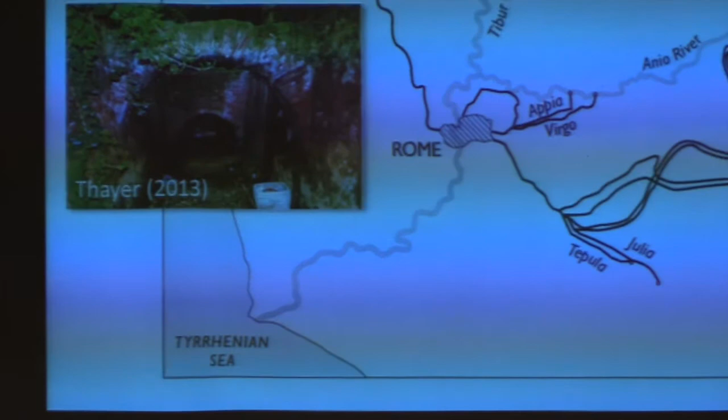So let me start with Water 1.0. In the book, I call it 1.0, 2.0, 3.0, and 4.0. It's kind of like computer operating systems — someone makes a small improvement to it, so you give it a number after the decimal point. So 1.1 becomes 1.2, then 1.3, and then someone says, hold on, this doesn't work well anymore, let's come up with something completely different, and you give it a number 2.0. And you go from there.

So what I tell my kids is Water 4.0 is just like Windows 8 going to Windows 9, except this works. I'm a Mac user, and we struggled with the computer tonight, so I can say bad things, but it's actually my computer that made the trouble.

In the book, I call the Romans and their way of providing water for cities Water 1.0. That's because the Romans took ideas that had been floating around in the ancient world and created a system. They took elements that other people had come up with to supply water into cities, and they systemized it, making it possible for a city of 1 million people to provide about 100 gallons per person per day of water.

That's pretty amazing when you think about it. That's like contemporary water use—not just the amount needed for cooking, bathing, and occasional house cleaning. That's what we use in our house today. And if you think about how much water we all use, here are the Romans 2,000 years ago providing everyone in the city with that amount of water.

This figure shows you a map of Rome from the height of the empire, and this is the full extent of the Roman aqueducts. You can see those aqueducts brought water from a distance of 50 or 60 miles away into the city, a series of different aqueducts built at different times.

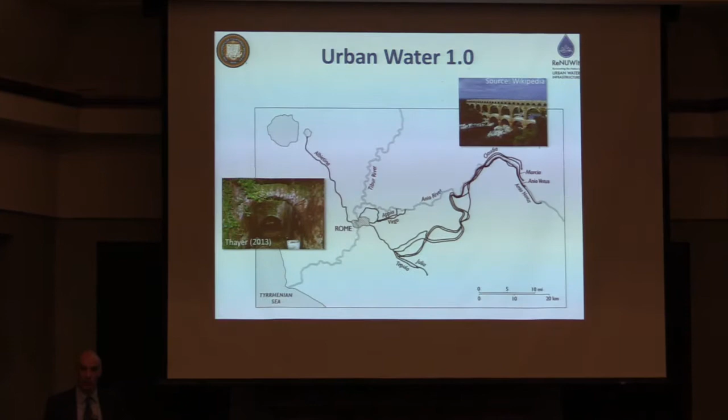The water came into the city and was used for more things than just drinking. There were fountains in central squares, ways that people could access that water. It was used for holding mock naval battles and for the famous Roman baths. It was used all over the city to make the city not only a place that people could live, but a place that was pleasant to live.

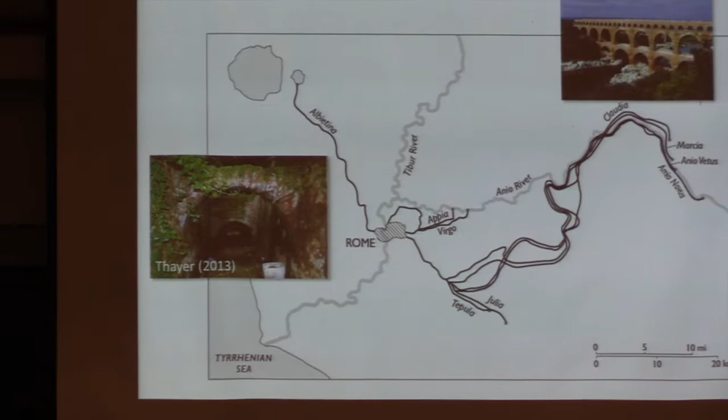When they were done with that water, it flowed into the street, going to the nearest low point, which in the early days was a ditch. Over time, those ditches traversed all around the city and got covered up because it was inconvenient to have ditches full of flowing water running through the center of the city. So the Romans not only gave us aqueducts and imported water, they gave us sewers. The cloaca of Rome are almost as big an accomplishment as the aqueducts that brought water into Rome.

When we think about why the Romans created a system like this, the first thing we recognize is that when you have a city with close to 1 million people, you can't get by on just the local water resources. You quickly exhaust the groundwater. And if you're not located on the shores of a great big freshwater body, like one of the Great Lakes, you overwhelm the capacity of the rivers to provide you with water. So the Romans did this in part because there was no other way to support a city of 1 million people than to have an imported water supply.

But I also wonder if the Romans did this a little bit to show off. If you think about what the Romans did in their capital, these were the richest kids in the ancient world, and like the nouveau riche that they were, they needed to show their neighbors how much stuff they had. They showed it by building great buildings and great monuments. In some ways, the aqueducts and this flowing, inexpensive, inexhaustible source of water in the city was proof of Rome's power and the power of the empire.

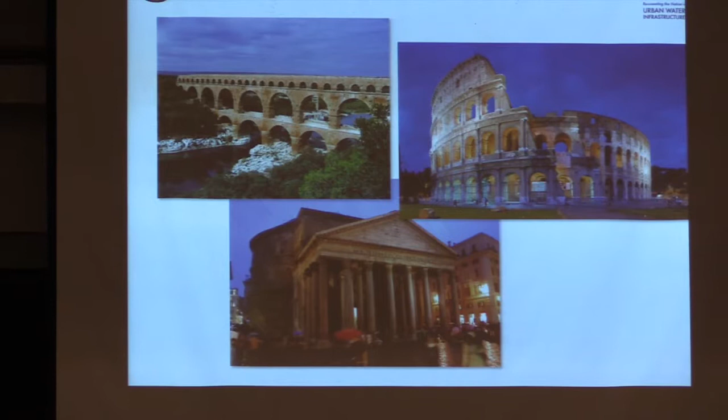It wasn't until the second half of the 19th century, when the Industrial Revolution came, that cities started to grow to the same size as they were during the Roman Empire. Starting the second half of the 19th century, you had London and then Paris growing to populations greater than 1 million people and exhausting their local supplies of water. When they exhausted those local supplies, they took a page out of the Romans' playbook and started building their own version of Water 1.0: a gravity-fed imported water system through aqueducts, sewers to drain the water out of the city, and then disposing of the water in the nearest water body.

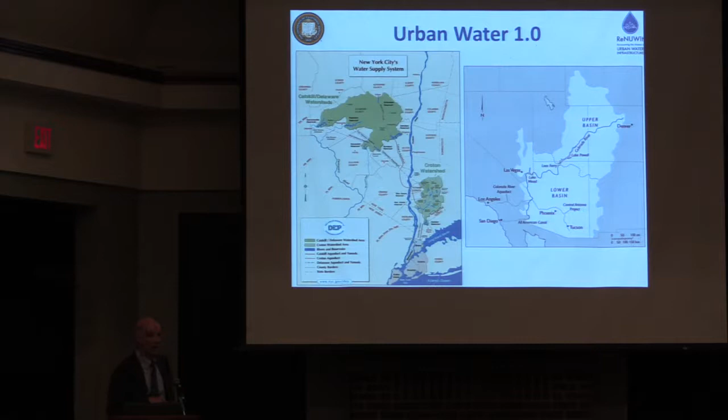In North America, we did something very similar. These figures show you the amazing gravity-fed system that provides New York City with its water. Before New York City's Croton and Catskills watershed systems were brought into the city as a source of drinking water, people in New York were struggling to find water.

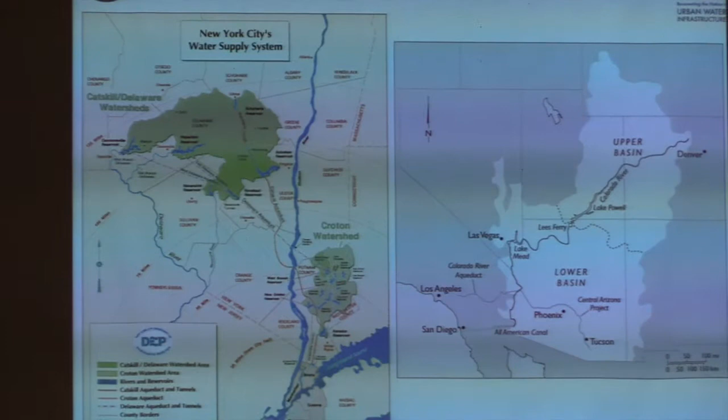They were drinking anything they could find. They were fighting over water, and they weren't consuming a lot of it. But when the people of New York made the investment in an imported water system, suddenly water was plentiful and widely used.

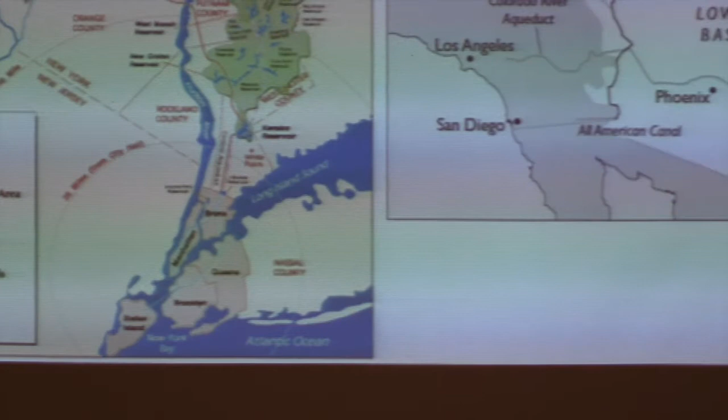But if you look at the heart of that New York City water supply system, it looks like the Romans' version of Water 1.0, just bigger. Instead of 1 million people, you have close to 10 million people in New York, and instead of bringing the water in from 50 or 60 miles, you're maybe bringing it in from 150 miles.

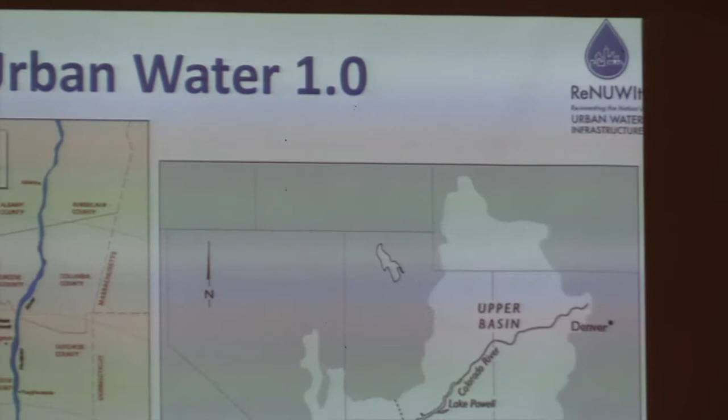It's the similar idea, just in a different time period. And if you go over to the other side of the screen, you see the Colorado River system, where in the early part of the 20th century we came up with a way to bring water into Southern California, into Las Vegas, and into Arizona, to make it possible to live in Phoenix and Tucson and San Diego. All of this was made possible by a gravity-fed system that started in the Rocky Mountains and brought water down to the coast. There you're talking about a factor of 10 bigger than the Romans, and you're also using that water for irrigation and creating farming in a desert. These are some pretty amazing accomplishments enabled by a pretty ancient technology.

There was one difference between the version of Water 1.0 built in the 19th and 20th century and the version the Romans had, and that difference laid the seeds for the next revolution in urban water. You see, when the people of London or Paris or New York built their gravity-fed water systems, they had something that the Romans didn't have: the steam engine, the water wheel, and more modern materials.

With these innovations, you didn't have to rely on just delivering the water to a fountain in the middle of a plaza and having everyone come with a bucket or a jar to take water up to their house. You could pressurize that water and send it all around the city and into people's homes. That was just the most amazing improvement in quality of life, because now instead of spending all your time hauling water up to your house and using it sparingly because it was heavy to carry around, you had more water than you knew what to do with in your house.

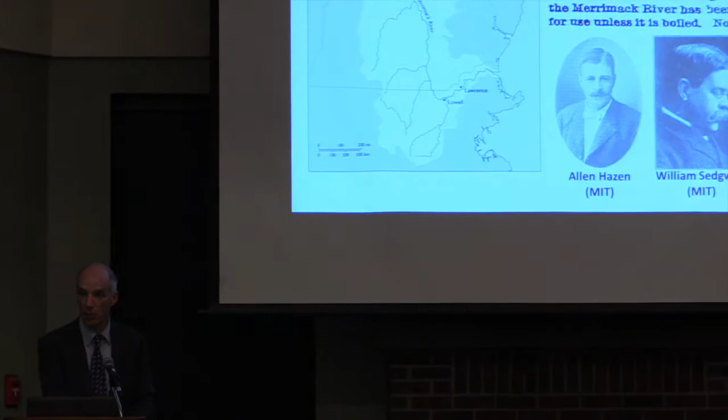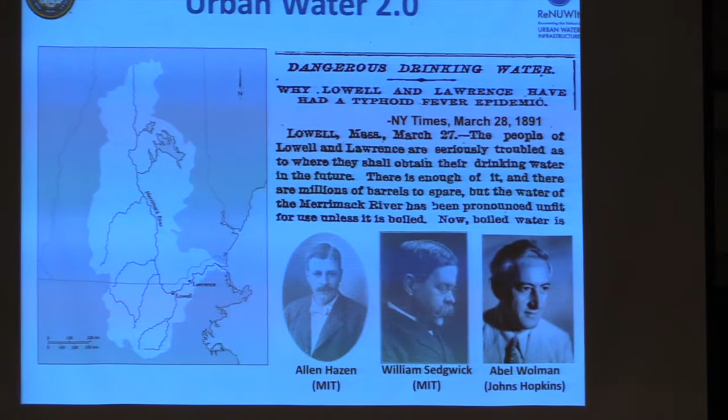So what we started to see in the late 19th century and early 20th century were outbreaks of waterborne diseases, like the cholera epidemic that hit London and parts of Europe in the latter part of the 19th century, or this example, which I talk about in Water 4.0, of the cities of Lowell and Lawrence on the Merrimack River in Massachusetts. I chose Lowell and Lawrence for a couple of reasons.

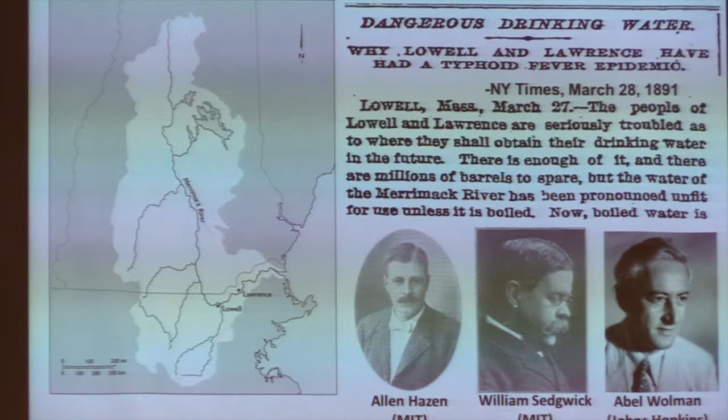Lawrence, like many places, when they started having problems with waterborne diseases from sewage contamination in the water supply, many cities just found a new source of water. They brought in an imported water supply from a pristine source and stopped drinking the polluted river water. But the poor folks in Lawrence didn't have that option. There wasn't an easy way to import water or dig more groundwater wells, so they were stuck with the Merrimack River. And the people in Lowell weren't about to stop using their toilets and putting their waste into the river. So you had these incredible outbreaks of typhoid fever.

So what happened at that point was that in desperation, they needed to find a way to drink sewage-contaminated water. And these desperate people did what desperate people do all the time: they put their faith in engineers and technology. Specifically, the engineers they put their faith in were a team from Massachusetts Institute of Technology's Lawrence Experimental Station. These engineers took ideas that had been floating around in different bits and pieces in previous decades and created Water 2.0.

Water 2.0 is drinking water treatment. It's the way in which we can take sewage-contaminated water and drink it without getting typhoid fever or cholera. It's truly a miracle in terms of its simplicity and its reliability.

Basically, the idea that the first drinking water treatment plants embraced was the slow sand filter. That is, if you pass water over a column of sand and let that sand develop, what happens over time is that microbes grow on the surface of the sand grains. Those microbes secrete a slimy coating called a biofilm, which acts as a glue and traps all the toxic microbes that can give people waterborne diseases. So the sand filter and its microbial community was capable of removing typhoid fever bacteria and the organisms that cause cholera and many other diseases from the water.

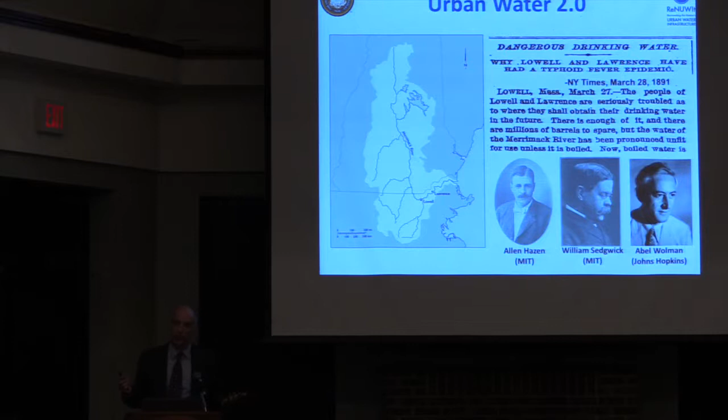So in a period from about 1900 to 1920, you went from a time when people were getting sick from drinking their city water supply to a time when it was safe to drink those water supplies because they'd embraced this revolution in water technology. And when you look back on the 20th century, you can see statistics from public health experts that show the average lifespan of Americans increased by somewhere around 15 years due primarily to safe drinking water.

So it wasn't just typhoid fever and cholera that was prevented. There are a variety of waterborne diseases that people didn't even realize were waterborne diseases that were killing people and affecting their quality of life. And this revolution, Water 2.0, made it all possible. So there's the first two revolutions in urban water.

Now, the thing that we weren't doing at that time, you might have noticed I said that, was we weren't treating the sewage that was coming out of all these sewers. So we had treatment on the front end, and engineers argued and argued about whether it made sense to treat the sewage to avoid putting these waterborne microbes into the environment. But they concluded it was just more efficient to let dilution do its thing, letting contaminants and microbes disappear in the river, and only treat the water you're going to drink rather than bother treating all that sewage. But there were some people who had a different opinion.

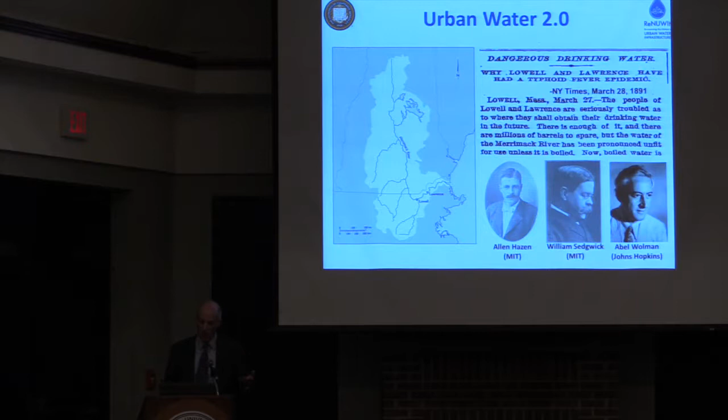There were people who thought it didn't make sense to put human waste into rivers and pollute those rivers. And they developed a technology which I'll call Water 3.0: the activated sludge treatment plant. There's a second kind of treatment plant called a trickling filter that uses the same general ideas, and it was also popular.

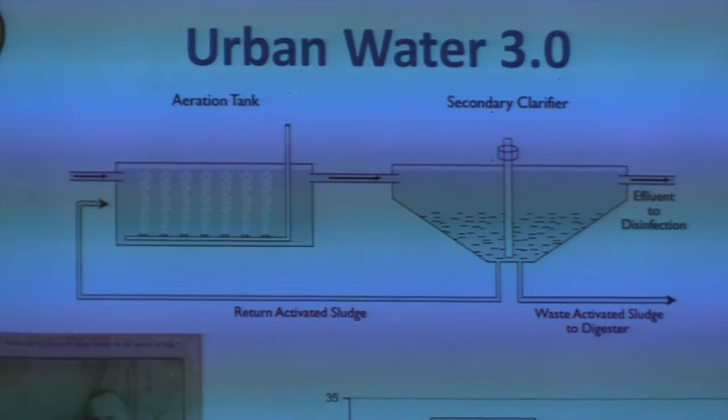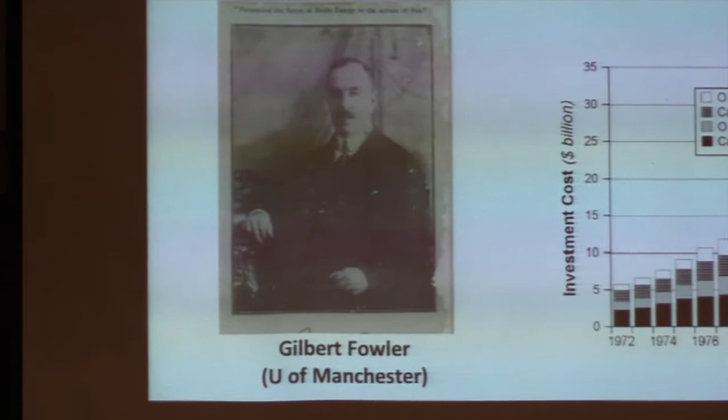But this activated sludge treatment plant is the treatment technology that most of us have treating our sewage today. So I don't know what you have here in this part of Ohio, but I'd guess you probably have an activated sludge treatment plant. This technology was developed in the first 20 years of the 20th century by people like Gilbert Fowler at the University of Manchester. They recognized that you could use microbes to break down the organic matter and remove all the nasty things in sewage.

So we had this technology developed in the 1920s that made it possible to treat sewage and prevent a lot of the problems that sewage discharges were causing, but most people just didn't think it was economically a good idea. So you have this period from the 1920s through the Depression and through the Second World War, and even after, when the quality of surface waters in North America, Europe, and many other places became worse and worse as population density increased. If you look back at the history of this time, you'll see people complaining the Great Lakes have too much algae, the Great Lakes are dying, there are fish kills.

Oh, we can't walk by the Potomac River because it's so nasty. The smell of hydrogen sulfide is disgusting. San Francisco Bay? No, you don't want to live near San Francisco Bay — the hydrogen sulfide coming out of the mud flats is enough to decay the paint on the side of your building. All of these things were happening, and people said someone should get together and fix this.

Isn't it a shame that the lakes are dying? We should really do something about this. But no one could get together the political will to spend all the money that was going to be needed to install modern sewage treatment plants in American cities.

No one could do that until the Cuyahoga River caught on fire. And no one could do that until people became aware that bald eagles and ospreys were disappearing due to the effects of DDT — which is really kind of an irony, that the catastrophes that led to the modern environmental movement had nothing to do with sewage disposal.

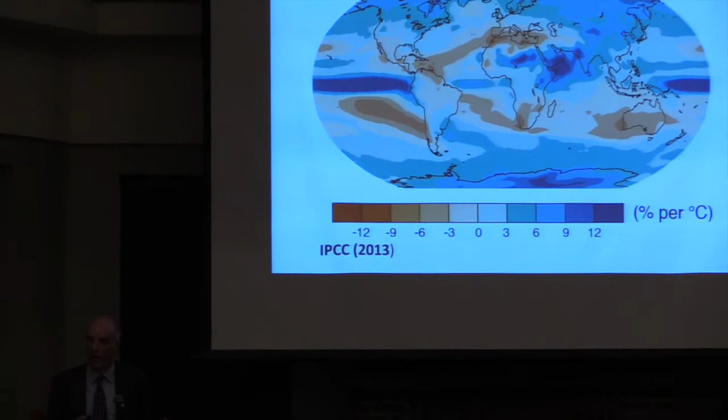For me, the number one concern with respect to the future of our urban water supply in the long term is climate change. I can say that because the science of climate change is showing us that the rainfall patterns are going to be changing. This figure, which comes from the 2013 IPCC report that summarized the state of the science on climate change, tells the story that the wet places are getting wetter and the dry places are getting drier.

If you look at this figure, the axis, or the colors, refer to the percent change in mean annual average precipitation for each degree centigrade of warming that's going to occur. In other words, in the 21st century, the average temperature is going to increase by several degrees centigrade. We have the power to decide how much that increase is going to be, but it's definitely increasing. And for each degree centigrade increase in temperature, some places are going to see 3 or 6 or 9 or 12% increases in precipitation.

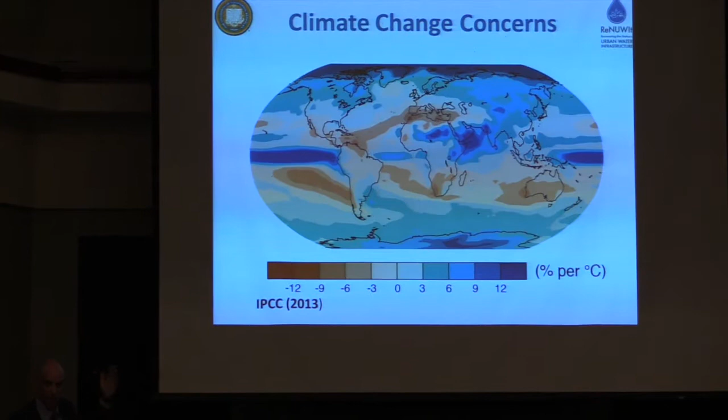That's the blue. And some places are going to see decreases in precipitation by 3 or 6 or 9 or 12%. So the areas that are brown and tan colored here are the places that are going to get drier in the 21st century.

If you look at this figure, you're going to see if you're in Australia, or the southern part of Africa, or much of South America, or the Mediterranean region, or the southern and western United States, parts of North America, you're going to see less rain, less water. If you're in the Great Lakes, more water. But that's the problem with climate change. Some places are going to win and some places are going to lose.

That's one thing that's going to decrease the amount of water available for cities in much of the world. But there's another thing that's going to decrease the amount of water available for cities in much of the world, and that's the change in precipitation from falling as snow to falling as rain. In the Rocky Mountains and in the Sierra Nevada mountains of California, much of our precipitation happens in the winter, in the form of snow, and that snow has this wonderful property of staying put, so it becomes like an in-place water storage system.

Now, when it gets warmer, more and more of that snow is going to fall as rain, and if we want to use it, we better be able to trap it by expanding the size of our reservoirs. That's going to be an expensive proposition, and not an easy one politically. You can imagine with the fights that we have over removing dams now, the prospect of increasing the size of dams is going to be really politically contentious.

I think we could probably do that in the Rocky Mountains and in California and parts of North America, but there are other parts of the world like Peru and India where people rely on glaciers as a source of water storage. And the predictions are that once those glaciers disappear, there's going to be severe water shortages in India, Peru, and other places.

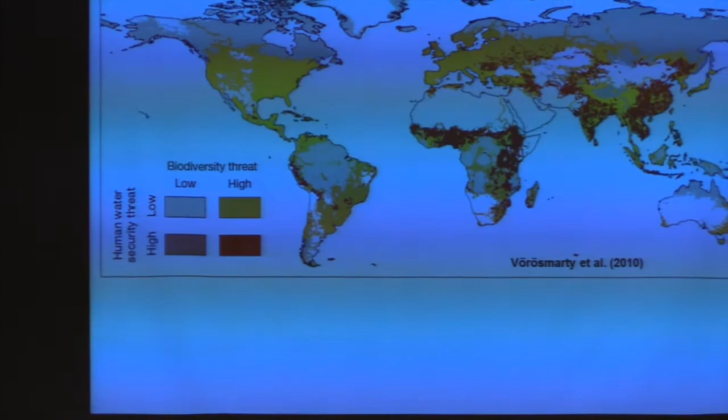It shows what you might call the water availability stress, or water stress index — the ratio of the amount of water used to the amount available. It looks at two things: whether we have enough water for people, the human water security threat, shown in brown or red if it's high threat, and the biodiversity threat, if there's not enough water for the environment, shown in yellow or red.

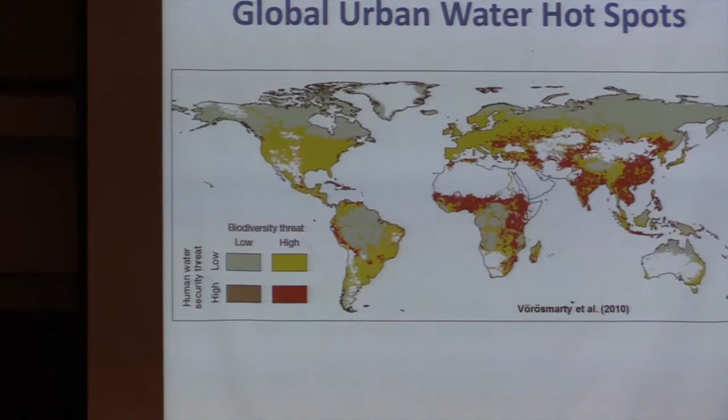The areas in red, like the Sahel in Africa, India, and parts of China, are places where people are taking more water than the environment can handle. But when I see these kinds of figures, I feel like they don't tell the story about what's happening in cities, because cities are 100 or 1,000 times more concentrated with people, and they have this huge water demand.

So I want to show you examples of two cities currently struggling with water availability problems, due partly to population growth and partially to climate change — places where I think it's going to get worse in the future.

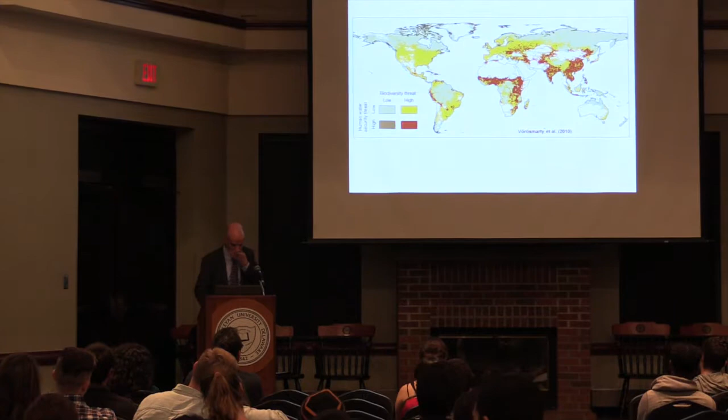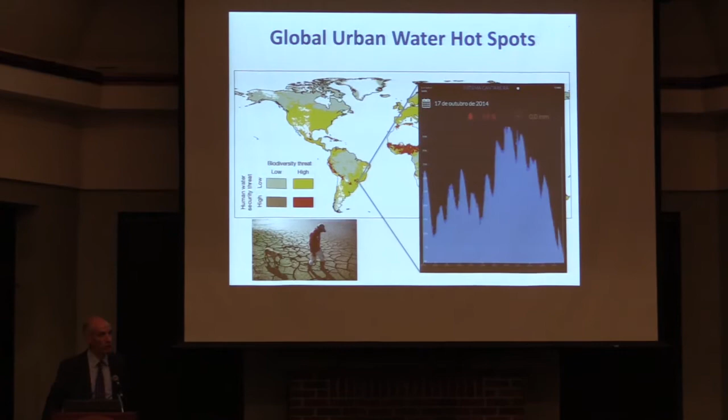This figure shows the main drinking water reservoir for the city of Sao Paulo, Brazil. The Sao Paulo metropolitan area has about 20 million people. When I snapped this figure off the city's website a few days ago, they were at 3% capacity of their reservoirs.

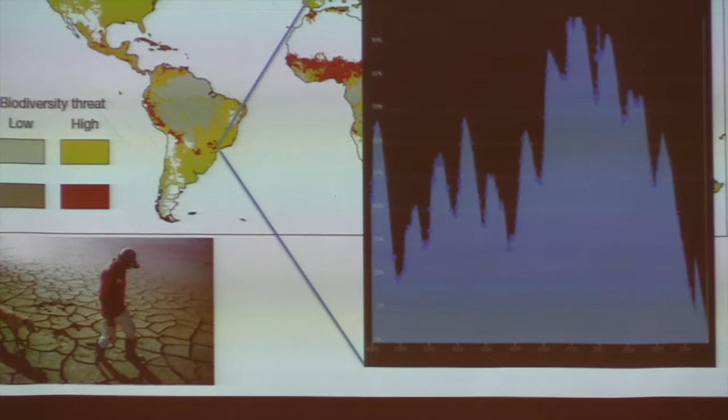It was estimated that in the next week or two, Sao Paulo would run out of water. I looked at it today — the number blipped up a little because at great expense the city brought in water from another part of the state in Brazil. But Sao Paulo is essentially out of water. They're out of water because they've been experiencing a drought of historic proportions, and because the population of their megacity has been growing quickly, and they haven't been able to keep up with expanding their infrastructure.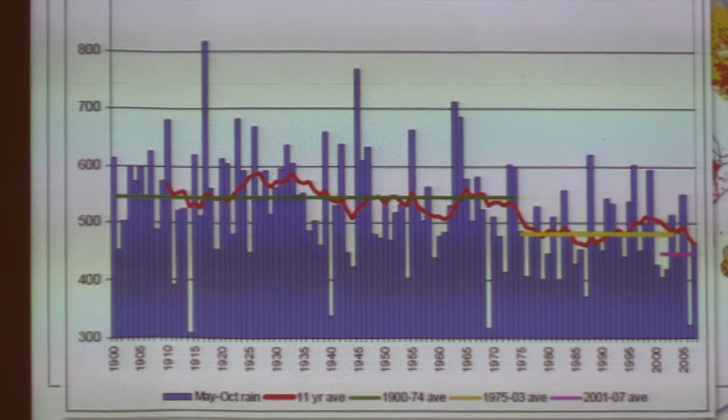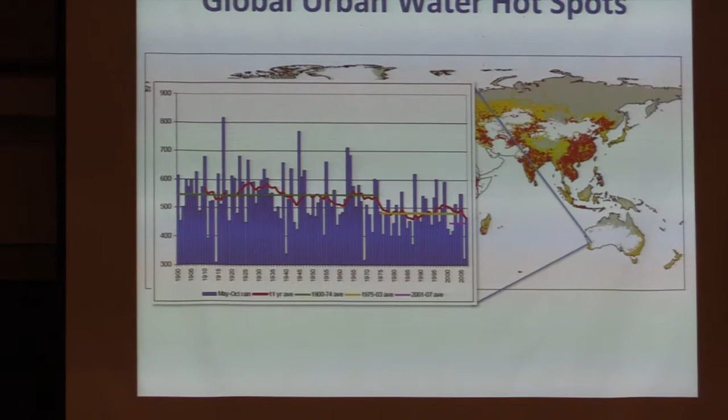Based on changes in ocean circulation patterns attributable to climate change, meteorologists and hydrologists in Perth don't expect that rainfall to ever come back. In response to this permanent decrease, Perth has made a major shift to obtaining water from seawater desalination plants. You've probably heard that Saudi Arabia, the Arab oil emirates, and Caribbean islands use seawater desalination because they have no other choice. Well, Perth, one of the biggest cities in Australia, now gets about half of its drinking water from seawater desalination.

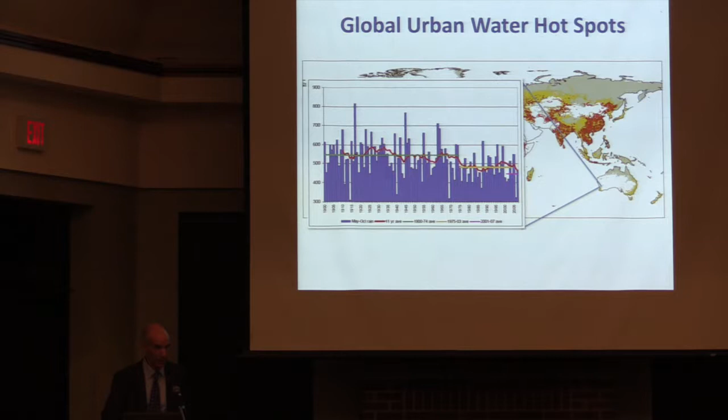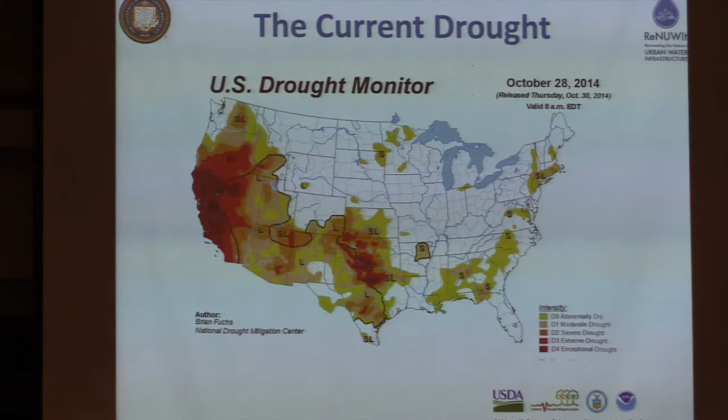As you might imagine, in these kinds of graphs, red is bad. This figure shows some pretty dark red in California, because we're in the middle of our worst drought in, people say, 80 or 100 years. I didn't think to bring a raincoat or umbrella with me because I just don't know what rain is anymore. This decrease in rain in California is not just limited to California.

You see a very severe drought in Texas, especially in central Texas, and until last year we had drought conditions in the Rocky Mountains. If you recall that figure I showed you from the IPCC report about predictions for the future, this is the future we can expect for the southwest and southern parts of the United States.

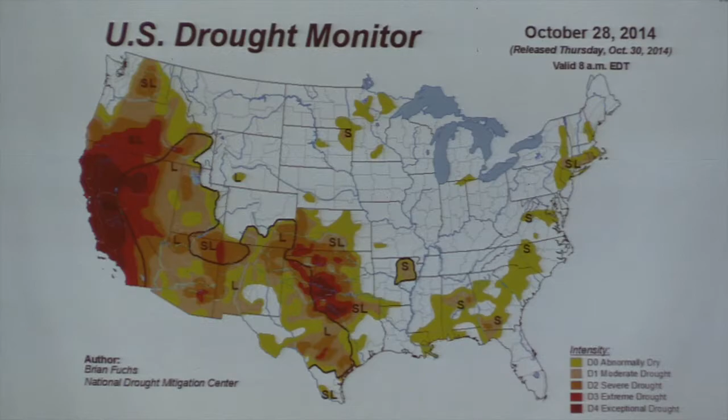The problem of a decrease in precipitation attributable to climate change is not our only problem we face. We also face this problem of population growth and shifts in population in the United States.

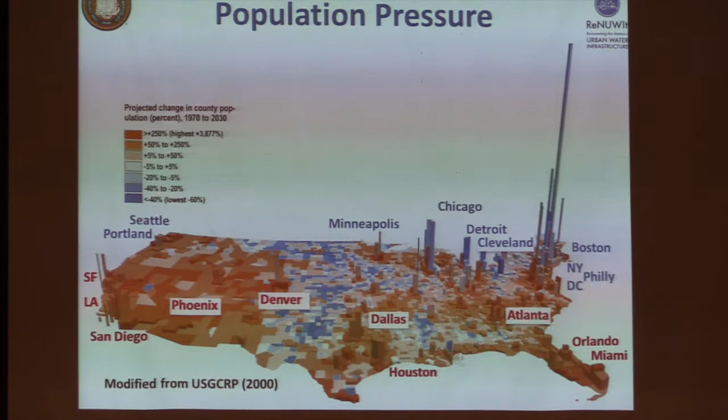This figure shows the county-wide population of the United States and how it's changed from 1970 to 2030, based on demographers' projections. In this figure, the irregular shapes are all the counties in the United States, and the height of each is proportional to the number of people living there.

You can see New York City and Manhattan with a really high bar, since it's one of the most densely populated parts of the United States. The areas shown in blue have been and will be losing population, while the areas in red and orange are gaining population.

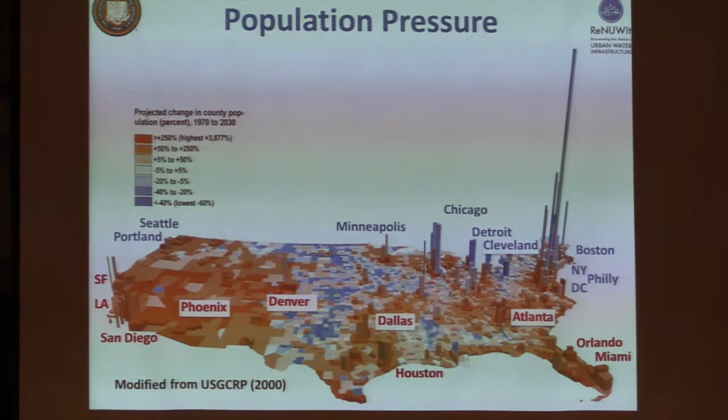So what do we learn from looking at the demographics of the United States? People are moving to the south and the southwest—exactly where the water isn't, and where it's not going to be in the future.

I took the liberty of putting the 20 largest metropolitan areas on this figure, labeled here. I marked in red the ones I thought would run into water security problems in the future, and in blue the ones that probably won't run out of water anytime soon.

If you think about all these areas in red where the population's growing at 1, 2, or 3% per year, over a period of 20 or 30 years we can expect 30 to 50% more people. So if you tell me we can solve inadequate water supplies purely by conservation, I'll tell you that population growth is going to eat up our efficiency gains.

There are still lots of things we can do to make our water systems more efficient, but population growth is working against us. The way I see it, we have a period of about 20 or 30 years before our water stress morphs into a water crisis.

You might think 20 or 30 years is a long time, that you don't need to worry about this until it becomes a problem. But working in urban water infrastructure—an area where when you build something it's supposed to last 50, 100, or 200 years—working where the public isn't particularly engaged or informed, and looking at national infrastructure during a time when government seems to have lost an appetite for maintaining and improving it, you can see we're going to have to pedal as hard as we can to head off this crisis.

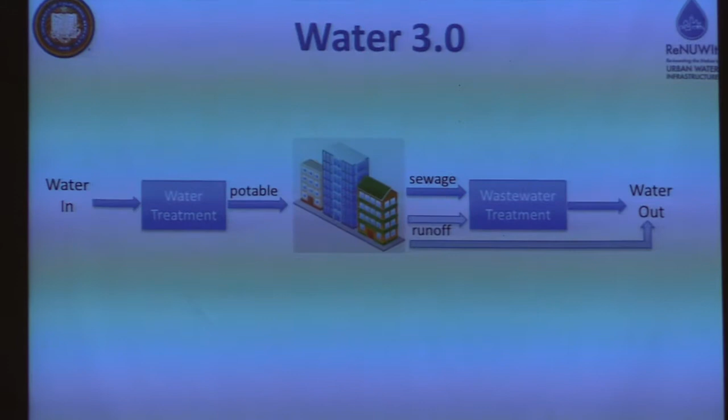This is Water 3.0, the system I told you about a little earlier. Water comes in on this side—imported water, water from different sources—and comes through a water treatment plant. That was Water 2.0, you might remember. It gets used in the city—okay, that's a schematic of a city, but that's a city—and it comes into a wastewater treatment plant, Water 3.0, and goes out into the environment.

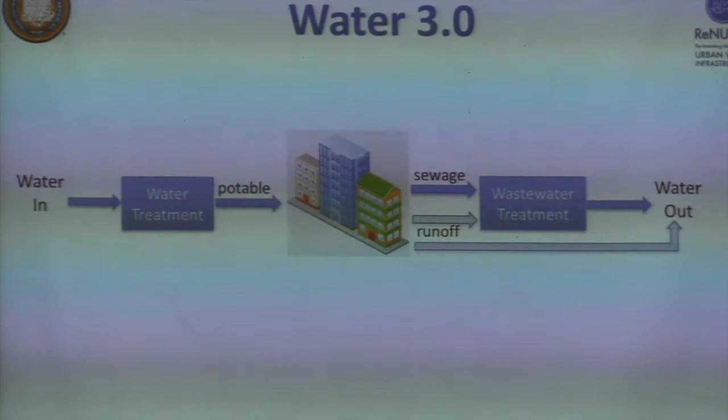Depending on whether you have a combined sewer or a separate sewer, the runoff may or may not go through the sewage treatment plant. But this is a linear system: water comes in on one side and goes out the other.

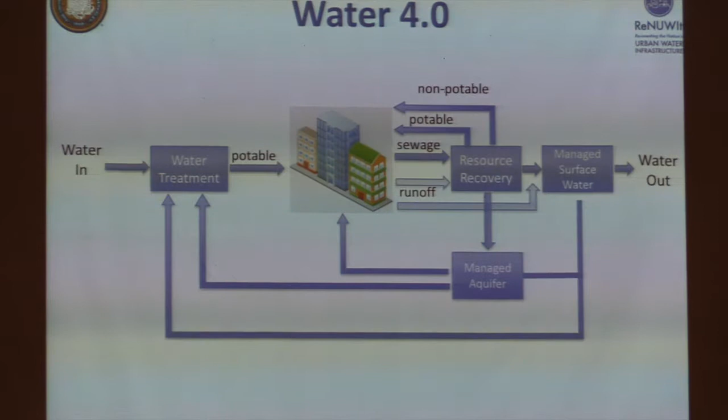This is Water 4.0, the blueprint of the fourth generation of urban water systems. What you can see here are a few changes: a few new boxes, a few boxes that changed their names, and a few new kinds of arrows. Let me explain Water 4.0 from a conceptual side, and then give you some examples of how it's being realized now in parts of the United States.

The first thing you see is that we no longer have sewage treatment plants or wastewater treatment plants. We have resource recovery facilities.

If you go down to your local sewage treatment plant, it might be called a resource recovery facility now, but that's just a matter of branding. In the future, these are truly going to be resource recovery facilities, and the resource they're going to be recovering is water. They might collect some nutrients, they might get some energy, but water is the most valuable thing in sewage. And what they're going to do with this water is some of it they're going to send right back into the city.

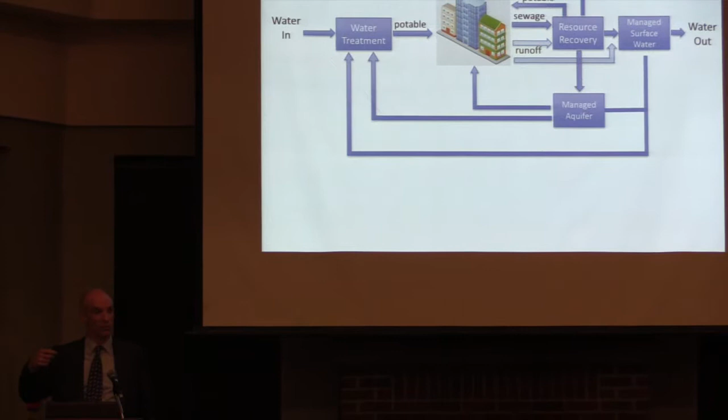This is the concept of water recycling or water reuse. You may have heard about non-potable water reuse, this idea that you could take water from the sewage treatment plant and use it in the power plant for cooling, or use it on the highway median for growing the grass, or send it to a golf course. But I'll tell you that the direction we're most likely to go in is potable water reuse. We're going to take water from the sewage treatment plant and make it our drinking water supply.

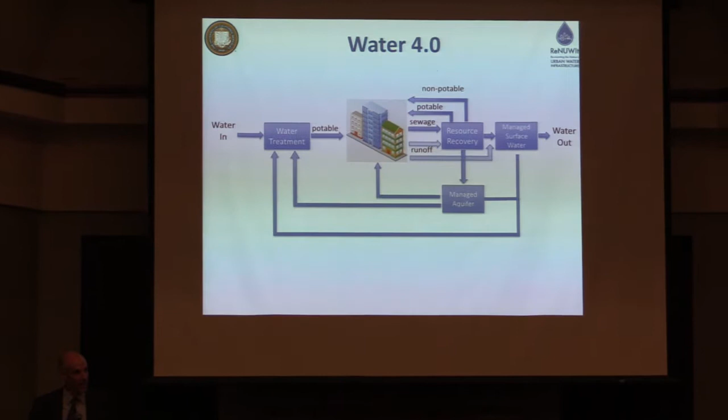The other thing you'll see here is that there are two new boxes: one called managed surface water and one called a managed aquifer. That's to emphasize the fact that natural systems are part of our urban water infrastructure. Right now, we don't acknowledge it. But when we put water into a river, that river is functioning just the same way a pipe does. And when we put water into a lake and take water out of that lake later, it's serving the same function as a reservoir. It's my contention that if we actively manage these systems, not only can they hold water and move water, they can purify water for us, and save us money and effort by acting as part of the treatment system.

They may act as such a good treatment system that they allow us to take this wastewater and bring it back into our city. That's another form of water recycling.

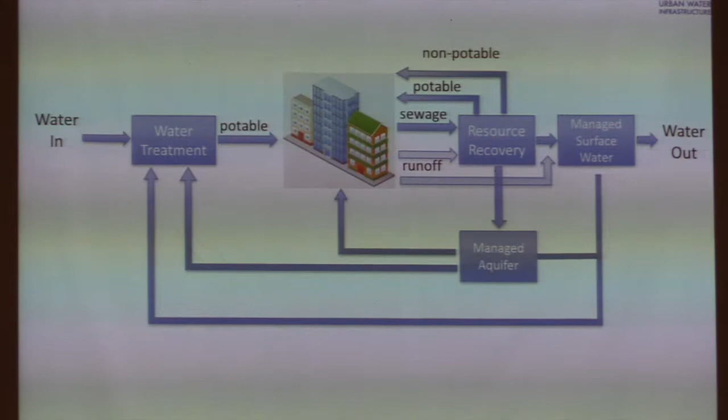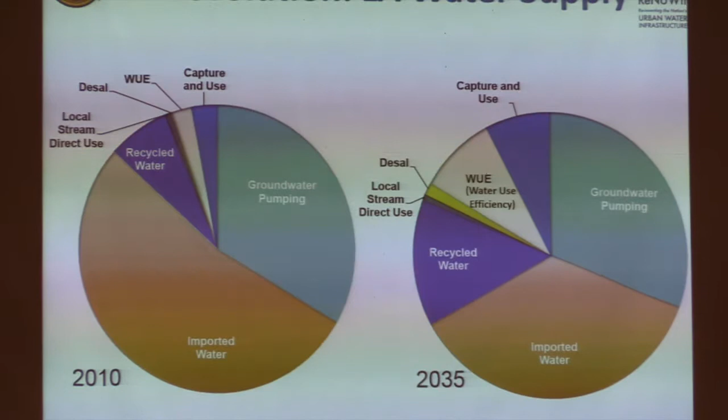So I told you that the title or subtitle of this talk was A View from the Other Side. And strangely enough, the other side of the revolution is called Los Angeles. That's really strange to me because I live in San Francisco, and in San Francisco we make fun of people from Los Angeles as being superficial and behind the times. We're the progressive ones. Well, in the case of urban water infrastructure, they're the progressive ones. And they're the progressive ones because they've had to be.

Remember, Los Angeles is a city of over 10 million people that gets its water mainly from imported water sources. It gets water from that Colorado River system I showed you, it gets water from the eastern Sierra Nevada mountains, and it steals water from Northern California—that's at least what we say in Northern California. And so they see the writing on the wall. They know that there's going to be less water available to them in the future. And so they've started building the fourth revolution in urban water systems.

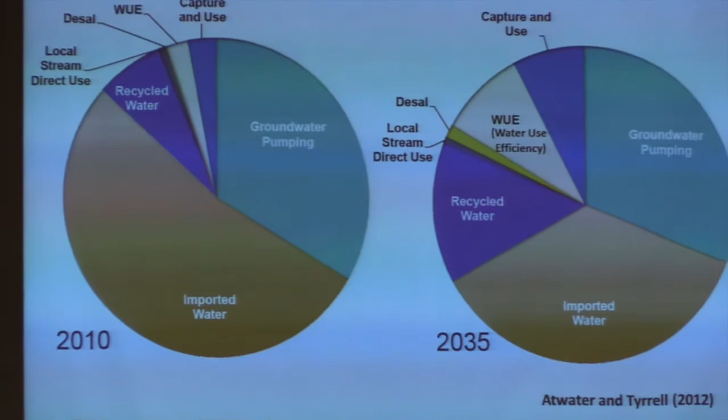The illustration I want to show you to give you a sense of their current level of progress is this pie chart, showing the distribution of where the water comes from for Los Angeles in the year 2010 and in the year 2035. What you'll see is that in 2010, about half of the water comes from imported water—that Colorado River supply, that Eastern Sierra supply, that Northern California supply. And in 2035, that imported water is only going to make up about a third. If we went to the year 2070 or so, it would be even less.

So they're slowly weaning themselves from imported water. And the way they're making up for that decrease is they're increasing the amount of recycled water that they use. They're engaging in something called capture and use. And they're doing something in this figure called WUE—that's water use efficiency. That's those efficiency improvements of low-flow shower heads, front-loading washing machines, and smart irrigation controllers on houses that you may have heard about. They know these are going to continue to come, but they're not going to solve all their problems.

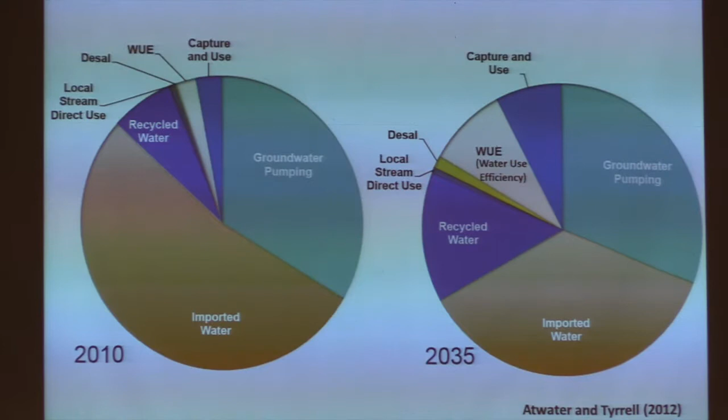I should mention parenthetically that groundwater pumping, you see here, stays relatively the same. The city of Los Angeles is spending somewhere around $900 million in the next 10 years to make sure that's possible, because much of Los Angeles's groundwater supply is threatened by hazardous waste from the aerospace industry.

Most of Los Angeles's drinking water supply, their groundwater supply in the San Fernando Valley, was located in places where large aircraft manufacturers were located during the Cold War, and they contaminated a lot of that groundwater aquifer. It's going to cost close to $1 billion to clean up that groundwater and make it drinkable. But the city's willing to pay this because they have so few options for finding new sources of water.

So what I want to do here is spend some time examining the water recycling and capture and use that's done in Los Angeles.

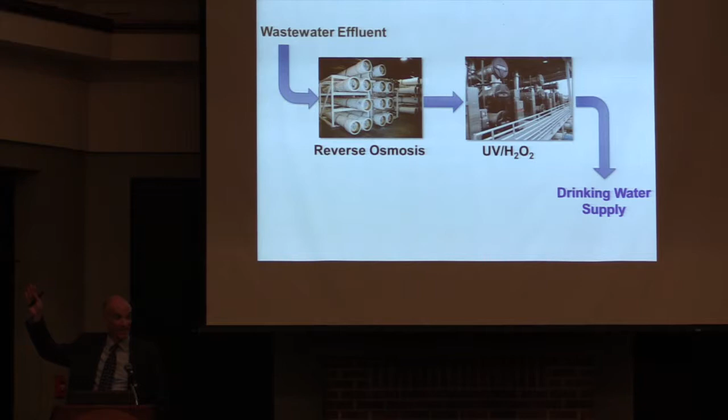First of all, let me tell you about potable water reuse. How many of you think it's disgusting to drink sewer water? Willing to do it? I have some in my bag here.

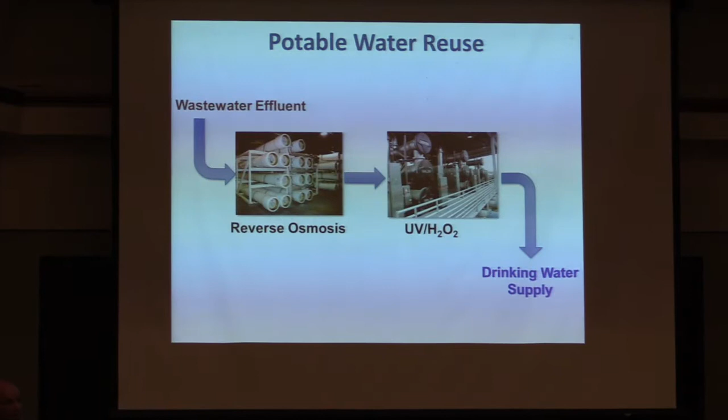In Southern California, it's not considered such an unusual thing, because there are cities in Southern California that have been drinking highly purified wastewater effluent for over 40 years.

And the technology to turn sewage effluent into drinking water is shown in this figure. If you've ever heard of the technology of reverse osmosis, this way of removing salts and particles from water, that's the first step in this treatment process.

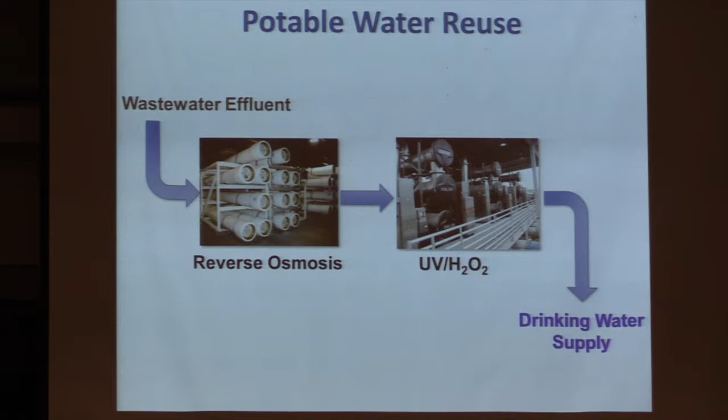The first example where this was done was in a place called Water Factory 21 in Orange County, California, a facility that was built in about 1976.

The people in Orange County were using their local groundwater, and they were pumping their groundwater too much. If you've had a geology class, you may realize that water flows downhill, and when you pump groundwater too much, all the water nearby flows to that well you're pumping from. If you pump the water level down below the level of the ocean, seawater flows in. So what they started to find was that the drinking water in Orange County was becoming salty from the effects of seawater.

So they took this strategy of building a line of wells about 3 miles inland and pumping fresh water into the wells to push the seawater back to sea. The only source of fresh water they could get was this highly purified wastewater effluent.

What they realized at the time, but maybe didn't publicize widely to the public, was that this water they were injecting wasn't only flowing out to sea—it was flowing back to the community and becoming part of their water supply. So this was the first potable water recycling project, the Water Factory 21.

That project was subjected to such public health scrutiny, and so many samples were analyzed, and so many health effect studies were conducted, that the regulators were pretty satisfied with the performance of the system.

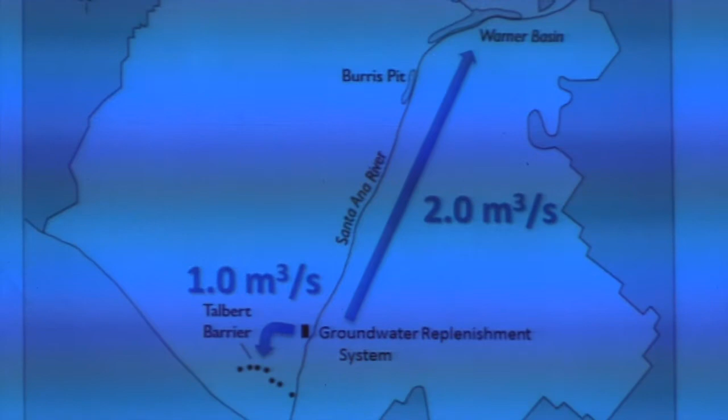Some of it goes back into those original seawater barrier wells, and some of it gets piped up to Anaheim and goes into a place called the Anaheim Lakes. It percolates through the lakes and becomes the local groundwater supply.

That idea of indirect potable reuse—taking wastewater, putting it through an advanced treatment system, and putting it into an aquifer—has spread to other parts of Southern California. There are a handful of projects that use this exact same approach.

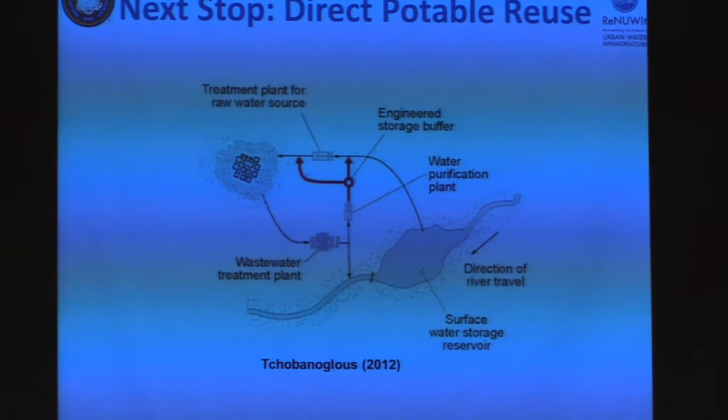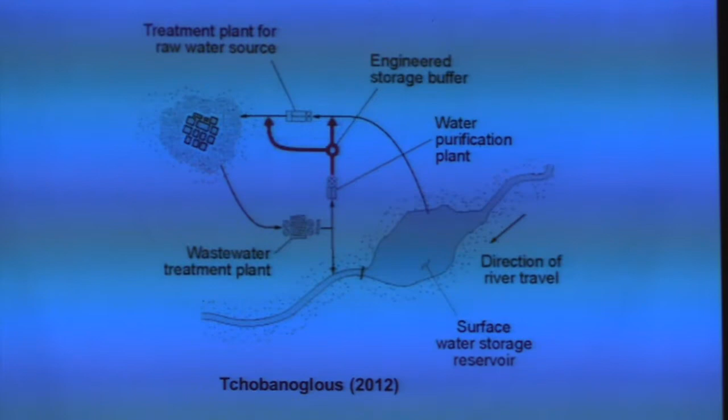In fact, people are so satisfied with that approach that the latest discussions have been: why do we need to take the water and put it back into an aquifer when we're done? Why can't we put it directly into a drinking water treatment plant or directly into the drinking water distribution pipes? That certainly was what the city of San Diego and its citizens said when the water utility in San Diego proposed to treat their wastewater and pump it back to the city's main reservoir.

They said, why are you going to emit all those greenhouse gases pumping that water uphill just to put it in the reservoir when we can use it down here in the city? Currently, the state of California is evaluating the potential for direct potable reuse, and we're trying to come up with ways it might be regulated because we're a cautious state. We move slowly, we don't want to get out ahead of technology. But in Texas, they built two treatment plants to do this, in Midland and Odessa, and they've been doing it for close to a year. So if I had a crystal ball, I'd say this is likely to become more common in the future.

I've been very interested in working with social scientists to understand whether the public will accept this new technology of potable water recycling, and why some projects are embraced and celebrated by the community while others are rejected. The Water Factory 21 project moved smoothly, but maybe that snuck under the radar because they put it in in 1976, before people thought a lot about their water. In the 1990s, there were a series of potable water recycling projects that failed because communities rejected them, yet other potable water recycling projects succeed. Working with social scientists, we've been studying the concept of legitimacy and how a new...

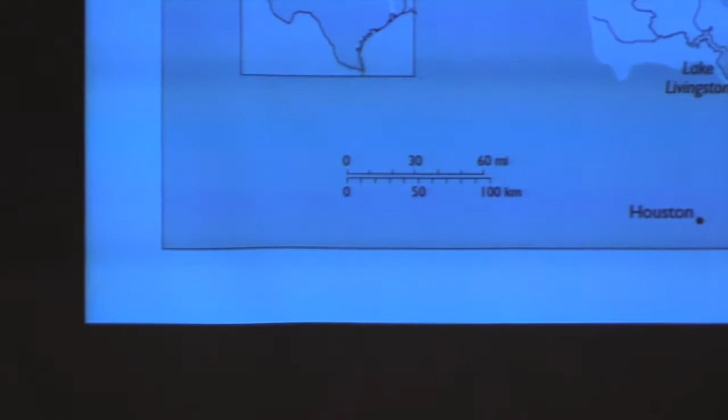This figure shows the Trinity River in Texas. The Trinity River is a convenient way of getting wastewater from Dallas and Fort Worth into the main drinking water reservoir for Houston. The water in Lake Livingston, one of the main drinking water reservoirs for Houston, is about 50% wastewater effluent from Dallas and Fort Worth. That water only makes a trip of about two weeks down a muddy river. It doesn't go through wetlands, reservoirs, or groundwater infiltration. It's not like you can say it's some other molecule.

I can find human pharmaceuticals in there. I can find tracers of wastewater. I can see as a chemist that this is wastewater effluent, and that's a drinking water supply. So I told you about drinking wastewater effluent when it's put through reverse osmosis, ultraviolet light, and peroxide. This is water that's been put through Water 3.0 and put into a river and then put through Water 2.0. This is something we do already, this idea of de facto water reuse.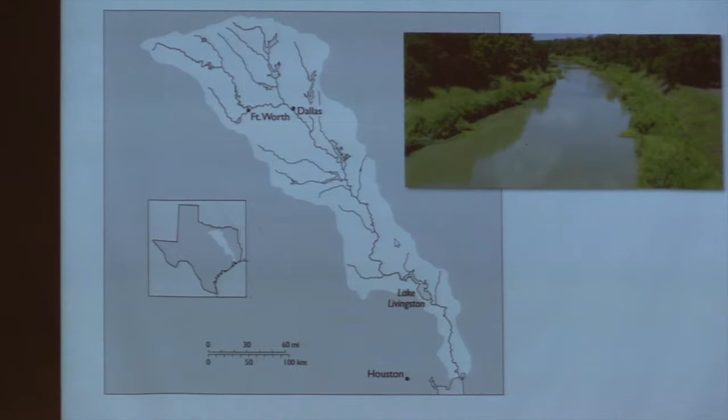I've been interested in this topic as part of my own research for about 15 years now, because I think this is a place where managed natural systems can improve water quality and make this form of unintentional reuse safer. The example, and a place where I've done a lot of this research, is in Southern California, in Orange County and Riverside counties, in a place called the Inland Empire.

Well, today the Santa Ana River flows all year round, and for most of the year it's essentially all wastewater effluent from the Inland Empire. The people in Orange County are really happy about that because that's an important part of their water supply.

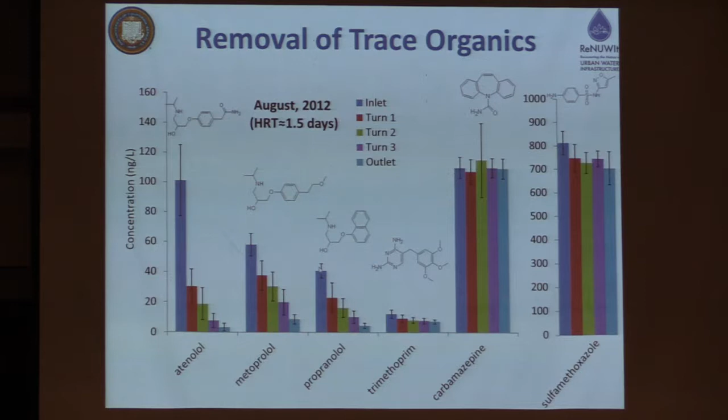And as we sampled in different parts of the wetland, many of these compounds disappeared. You can see them decaying away as the water flows through the wetland. Some of them didn't degrade; they weren't susceptible to degradation by sunlight. But many of them degraded, and degraded a lot more quickly than they ever did in the vegetative wetlands that we'd studied previously.

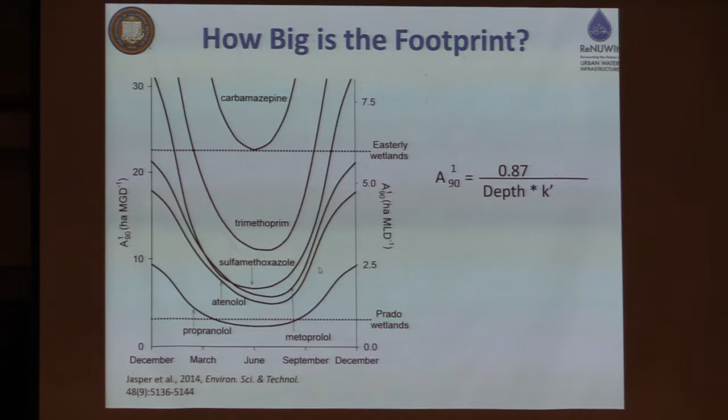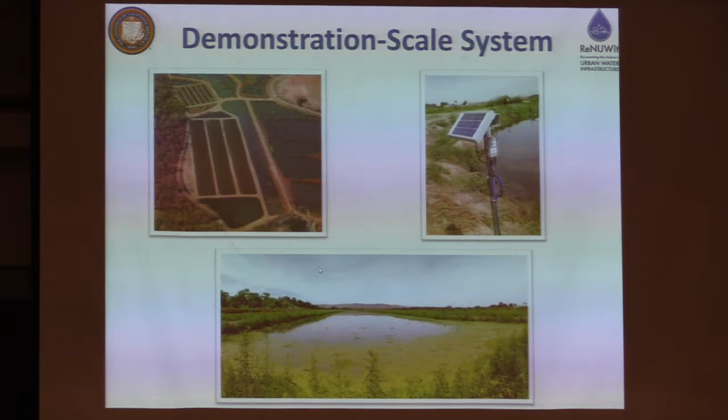And it uses our principle of using shallow water and blasting it with sunlight to remove the trace organic contaminants, to inactivate the waterborne pathogens, and to remove the nitrate. We've been collecting monitoring data for the past year, and we've seen that this system's performing quite well at this large scale. We've been automating our monitoring systems by using solar-powered online sensors, so now I can sit at my desk and look at the concentrations of many of the things coming in and going out of the wetland, and not have to go down there to make sure it's working.

I told you that Los Angeles had used this idea of water recycling, but they also wanted to use another idea: groundwater recharge. And I think that this system of managed aquifer recharge is a good example of some of the technologies that geologists and microbiologists have taught us can be used for water recycling projects.

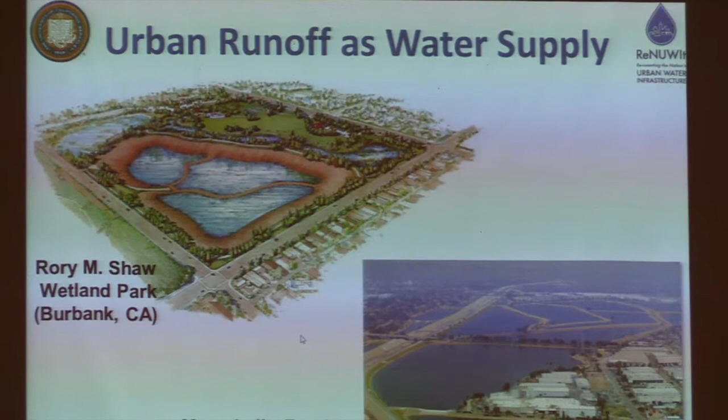The other technology that's being used in Southern California is this idea of capturing urban runoff and using it as a drinking water supply. I know here in the Midwest and in the Northeast and the Pacific Northwest, people worry about stormwater because it can cause combined sewer overflows.

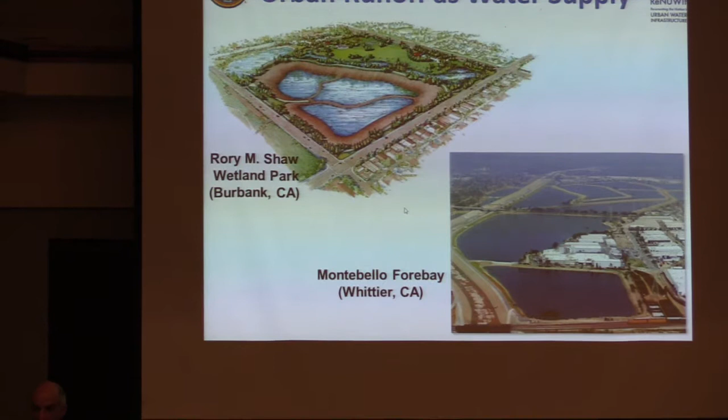In Southern California, the city wants to capture that urban runoff - the water that flows in the streets when it rains - but they don't want to put it in a rain garden or get rid of it for a little while and then release it to the sewer. They want to capture it and put it into the drinking water supply.

And if you know anything about the hydrology of Southern California, it rains when it rains. It rains about 5 times a year, and it rains in massive storms - 4 or 5, 6, 7 inches of rain over a period of 2 or 3 days. You're not going to use a rain barrel on the downspout of your house, or a bioswale, or a green roof to capture this water. You need to think big.

So this is one of the facilities that's been operating in Los Angeles County near Whittier for about 30 years, called the Montebello Forebay, where they capture rainwater runoff and infiltrate it into the groundwater supply.

This is a project that's being built now by the city of Los Angeles in Burbank, where they bought an old gravel quarry that was abandoned, and they put a plastic liner in the bottom of it. They're capturing all the rainwater that falls in the nearby neighborhood, storing it, and then gradually passing it through this series of wetlands. In this figure, this area is actually an infiltration gallery - they're percolating that water to groundwater after it passes through the treatment wetlands. That's kind of an interesting new project.

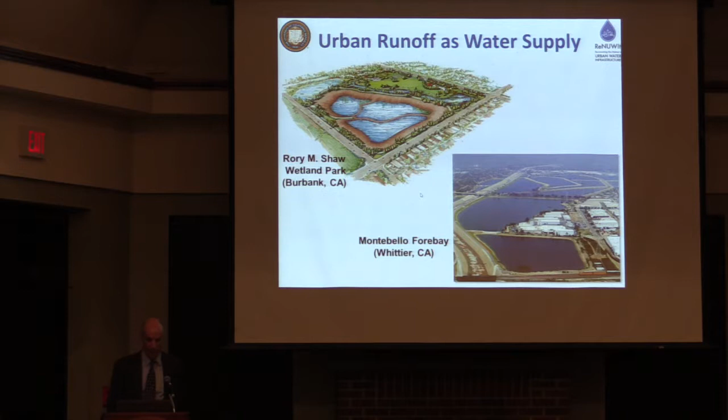I'm going to skip these slides here in the interest of time, and then just kind of end with a few remarks about how we make water revolutions happen.

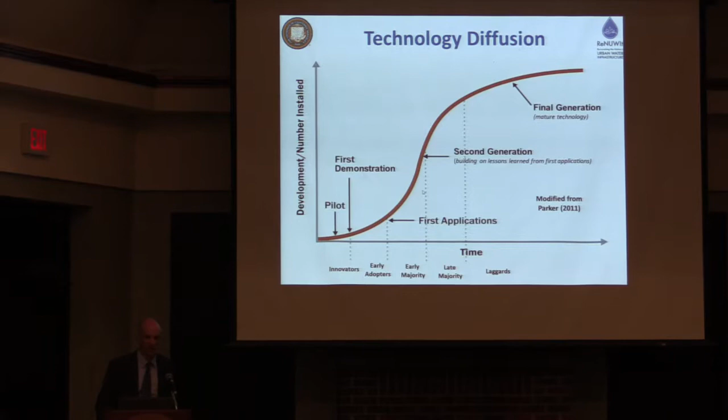So I told you about some of the technologies that are being used as part of the fourth water revolution. And I think when you think about the water revolution that happens in wet places, or that's going to need to happen in wet places, you can see that it's going to take some demonstration projects like the ones I talked about tonight, and it's going to take some motivation and dedicated individuals to make it occur. I've been very influenced thinking about the way in which these new technologies will become adopted and become commonplace by people in an unlikely place.

I've been interested in the way that the semiconductor industry thinks, and information technology thinks about technology diffusion. This figure here is something that you can find like in an intro to business class that you might take before you go into the IT sector. It's called the S-curve for technology diffusion. On the y-axis, it shows you the number of units of something that are actually sold or in use. And the x-axis is time.

So what you can see happens in the lifetime of a technology is first someone invents it, and then they develop a pilot or a prototype of it. And then they take that pilot or prototype and they show that it can work in a larger scale system. They make a demonstration of it. And then that demonstration convinces a group of people referred to as innovators, the kids who want to be the first one on the block to own it. They're going to buy it and build it.

And then those innovators have this really cool new technology they're using, and then the other kids come over to their house to see it, and those kids are called the early adopters. So those early adopters say, well, it works for that person, I want to buy one. And then the early adopters inspire more and more people to acquire the technology. We refer to them as the early majority and late majority. And then by the end of this S-curve, the only ones who don't have one are the laggards.

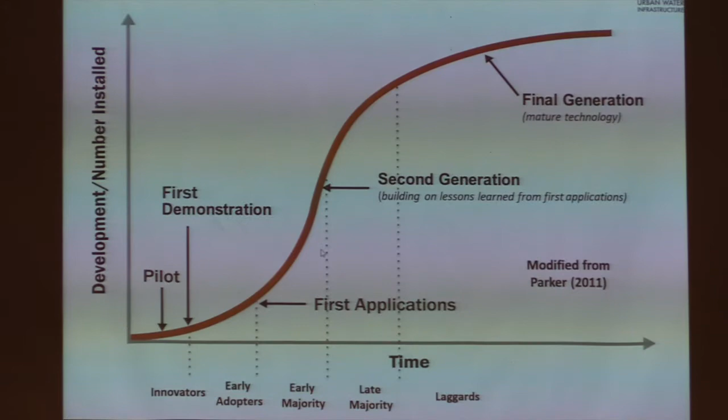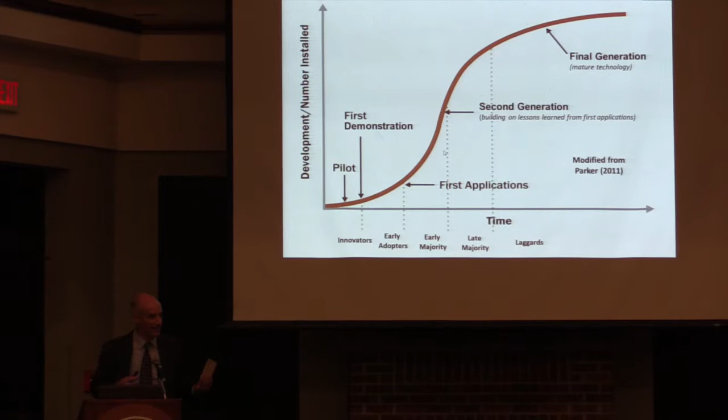So you all know how this works with a cell phone, right? A new cell phone comes out, some early adopters willing to pay an exorbitant amount of money to be the first kid on the block to have one, and then those tech geeks that you know go and buy them, and then you feel like, oh, I don't have one, I should probably get rid of my new old phone and get one, and the only person that doesn't have it is your grandfather, right? That's the idea of the S-curve for technology diffusion as applied to telecommunications.

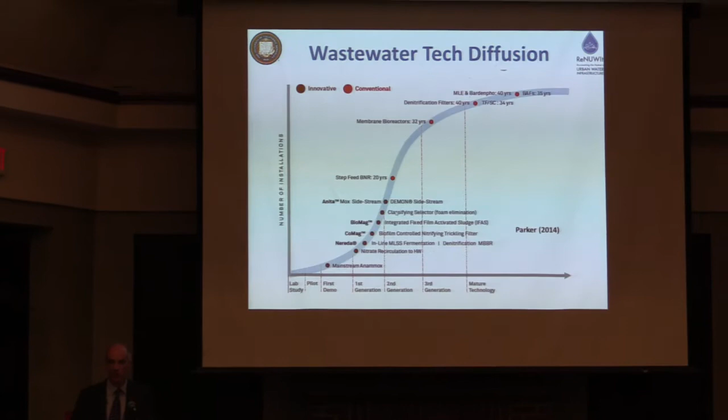That occurs over a period of 3 to 5 years. So when you think about the timeline from an invention to getting something out on the market, it's very short. This is the timeline for wastewater technology. A guy named Denny Parker did this analysis a few years ago, looking at the wastewater technologies that have made this transition up the technology diffusion S-curve. And the really sad thing about it is that for a wastewater treatment technology to make this journey up the S-curve is something like 30 to 40 years.

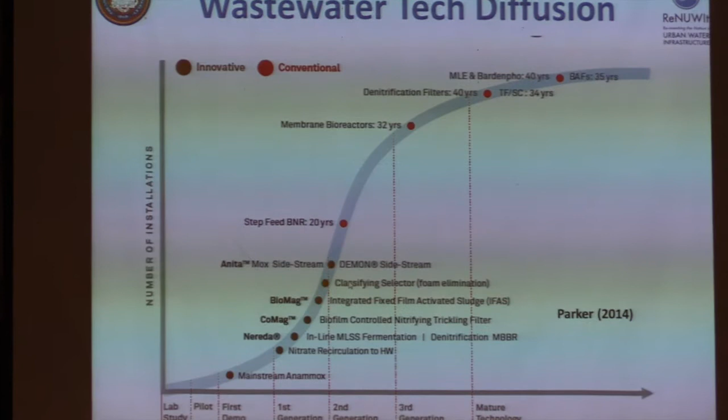And that's because the water infrastructure area is a place where there's low return on investments, there's a long lifetime of the infrastructure, and it's a field where we're really worried about potential adverse public health effects and consequences of building the wrong technology. And so we have to struggle. Like I told you at the beginning of the talk, we might only have 20 or 30 years to make this revolution happen, and we have a technology S-curve that takes 30 or 40 years to happen.

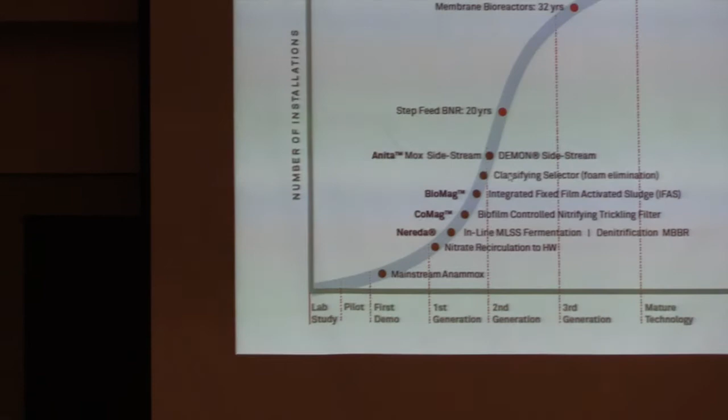And so one of the things we have to do is pay a lot of attention to the business system that takes new ideas and new technologies and brings them out to market. So I told you a little tonight about our open water unit process wetland system. That was something that we invented about 7 years ago. We piloted about 5 years ago, and we did at the demonstration scale about a year ago.

And so now we're in the process of looking around. We found our innovators. Our innovators were the Orange County Water District. Now we're looking for our early adopters, and we're actively seeking other utilities around the country that might want to build one of these systems to start that momentum up the technology diffusion S-curve.

So some final thoughts from this side of the urban water revolution. I think I showed you tonight that the revolution is coming. I showed you some of the drivers for the revolution. I've even shown you the outlines of the blueprints of the revolution in urban water supply. And the key to making this fourth water revolution happen, whether it's the revolution in urban water supply or the revolution in water management, is advancing the next generation of technologies.

I showed you a pathway through which good ideas can be taken to the demonstration scale. But there was also something else I showed you: this idea of creating legitimacy or acceptance of new technologies from a skeptical public.

I also tried to demonstrate tonight that this urban water revolution, unlike the revolutions that preceded it, is going to integrate the natural environment as part of the treatment system. Think about it: water flowing out of our cities cleaner than the water that flowed in, using the ecological services of wetlands, aquifers, rivers, and lakes as part of our treatment system rather than as part of the disposal system.